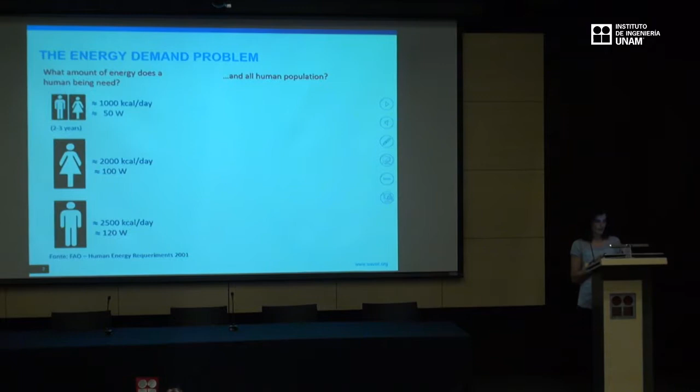And the challenge was to calculate the amount of energy that a human being needs to survive. So he got these values you can see here that are different for women and for men. He attained a value for the energy needs for one person. But the truth is that we don't actually use just the energy that we need to live.

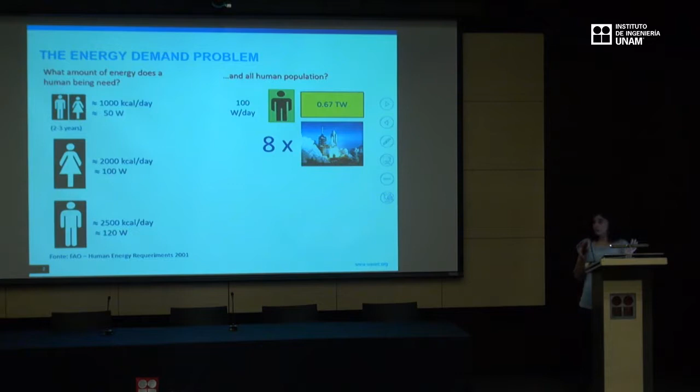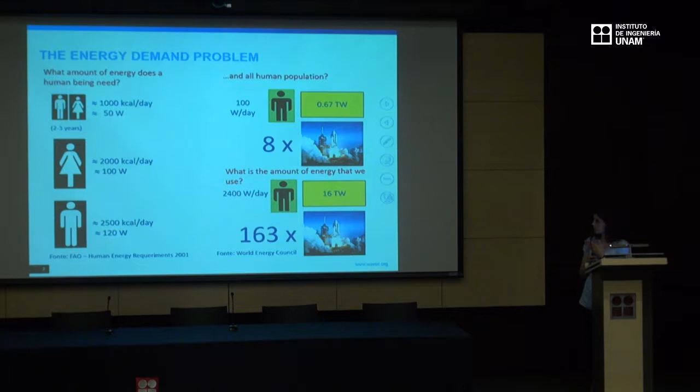If we think about the energy that all humanity needs to live, to survive, we have to have per day 8 times the energy that is needed to put the space shuttle in the air. But actually, the amount that we really are using is much more than that and corresponds to 163 times the energy needed for a space shuttle. The space shuttle goes to space. So this

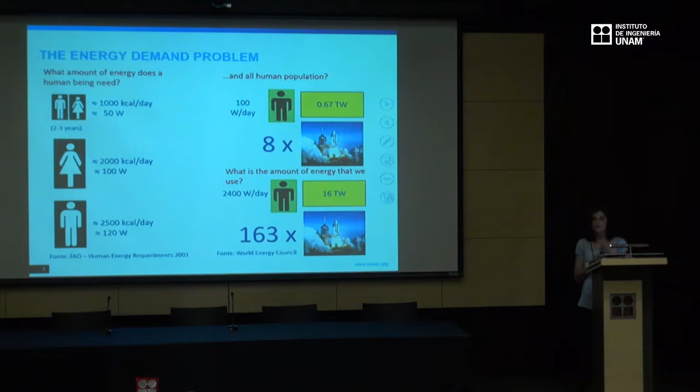is a real problem for all of us because there's a real energy demand that human beings are used to, and we need to face this. The other problem is that the traditional sources from where we get energy are getting rare. We have oil, gas, coal, and uranium, but for all these energy sources, there is a limited time if we continue using energy like I said before.

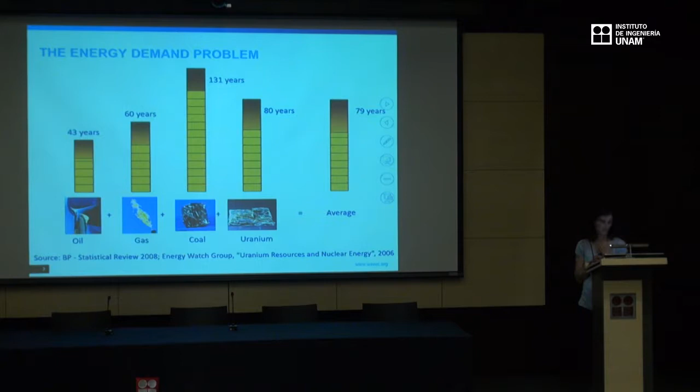So this is maybe a very dramatic prospect. Maybe it's not like this. Maybe this is the worst case situation. But anyway, it shows that this kind of energy is short-time energy available for all our energy demand.

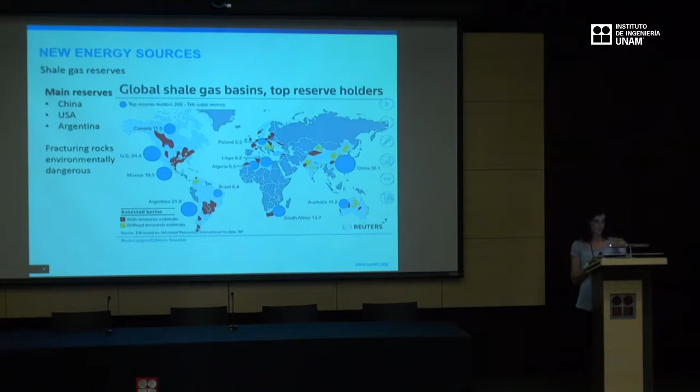So this means that we need to find other sources of energy, and one of them you probably heard about is shale gas. There are a lot of reserves for this kind of energy. It results from the fracturing of special rocks. But the harnessing of this kind of energy is very, very dangerous for the environment, which means that we cannot use it longer. And again, this is not a very good energy to rely on because of that.

The other source of energy that a lot of people are now looking for is the oil present in big reserves below the pre-salt layer, below the surface of the seabed. But again, this has a lot of challenges related with technology. We are not yet there to take the oil that is below this pre-salt layer. It's very expensive to get this oil. And again, this means more oil and more greenhouse gases going to the atmosphere, and we know that is not what we want.

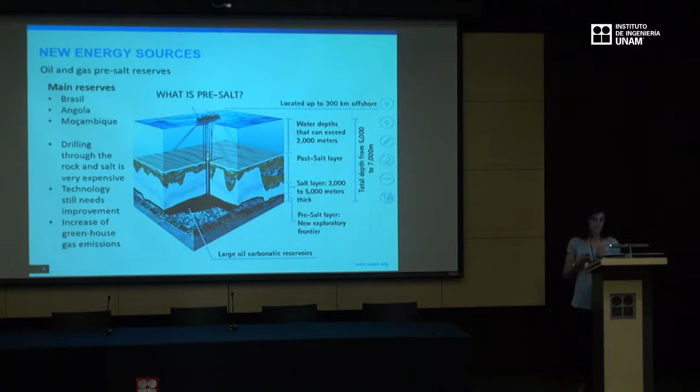So this means that maybe renewable energy can somewhat complete this high energy demand. Of course, renewable energy sources alone could not solve the problem, but this is the sector that has attracted a lot of interest from commercial developers, because it can really be used as a big source of energy for the energy mix that we need to survive and to correspond to this high energy demand.

So what happened is that in Europe we realized that we need to look at this sector with other eyes, and among other targets that were set before, which were very ambitious. Some years ago, the initial EU commitment was to have 80 to 95% of greenhouse gas reduction by 2050, but they realized very soon that this could not be possible because there was no conditions to get there.

So the current trends in the policies in Europe establish that we will possibly get about 40% reduction of these greenhouse gas emissions by 2050, but this has to be done using renewables and also saving energy, or trying to improve that part, because we are actually expending a lot of energy that probably can be saved by other methods.

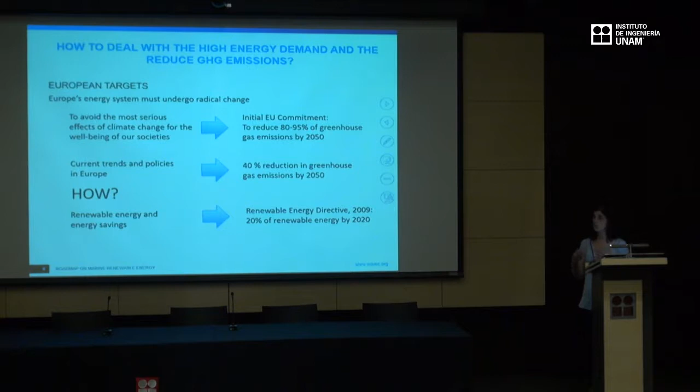These European directives need to be implemented in each member state. So this means that they need to be part of the legislation in each member state, so they need to take it very seriously. And that's what happened. So most part of the countries actually are getting there.

A lot of prospects for 2020 have been made for marine renewable energy, and the graph you see on the left represents the sources of renewable energy compared with the traditional energy that is used by fossil fuels or gas or whatever. You can see that it has increased since 2005, and the trend is that it is going to keep increasing until 2030.

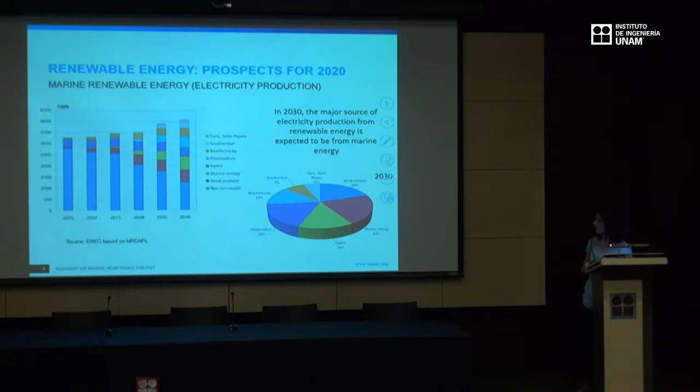Among this very high percentage that is predicted for 2020 in Europe, there is a very important part that is predicted for marine energy. About 20% of the energy that is predicted from renewable energy sources is supposed to come from marine energy. It's the red part that you can see in the pie chart on the right.

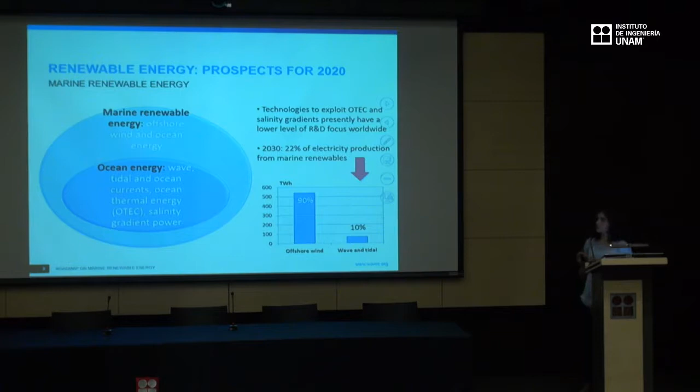So, among these 22% of electricity production from marine renewables, we expect that about 90% of it will correspond to offshore wind, which is the front runner in terms of marine renewable energy, and only 10% to wave and tidal energy. This is mainly related to the progress on the technology that is not yet mature to start commercial production.

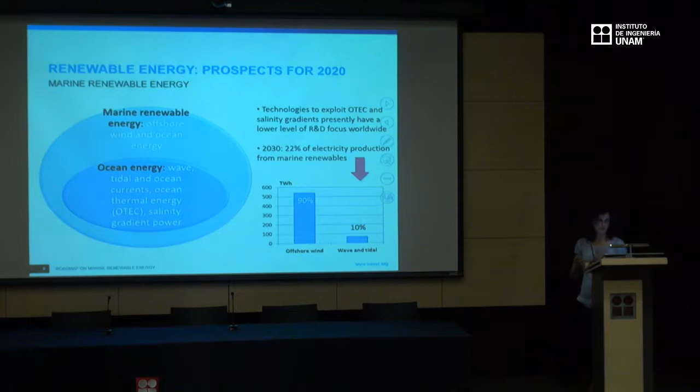Another thing I would like to say here is that when I speak about marine renewable energy, I'm talking about offshore wind and ocean energy. Marine renewable energy includes all the sources of energy from the ocean and also from the wind in the ocean. And when I mention ocean energy, I'm talking about wave, tidal, ocean currents, ocean thermal energy that we call OTEC, and salinity gradient power. The last two are less developed compared with wave and tidal, where technologies have been installed and tested. But for OTEC and salinity gradient power, the things are still a bit more delayed.

This is the prospect for offshore wind. I have a map there that represents the North Sea and all the projects that have been installed and that are predicted for this area in the north of Europe. As you can see, it's a huge area that is going to be occupied by these offshore wind parks.

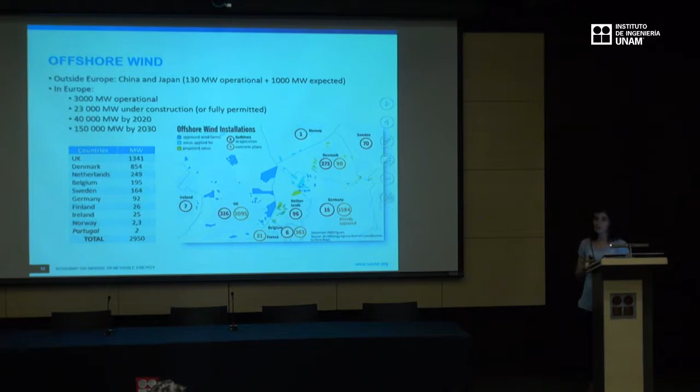But this is not only in Europe. In China and Japan, there are a number of other parks that are predicted to be installed there, and the amount of energy that is going to be produced from them is also very high, and the estimation is that it is going to increase in the future.

So what happens with this offshore wind technology development is that most of the parks that have been installed correspond to turbines that are installed in nearshore areas, where the towers can be fixed to the seabed.

So the big challenge here for offshore wind is to go further offshore. And for that, we need to have platforms. We need to fix or put the turbines floating, otherwise it will be impossible in terms of costs to have the turbines fixed on the seabed with hard structures.

And this is especially because the wind speeds offshore are much better, so it means the turbines offshore can be bigger than those near shore. The resource there is much higher, so it's going to be much more productive to have the turbines further offshore than near shore.

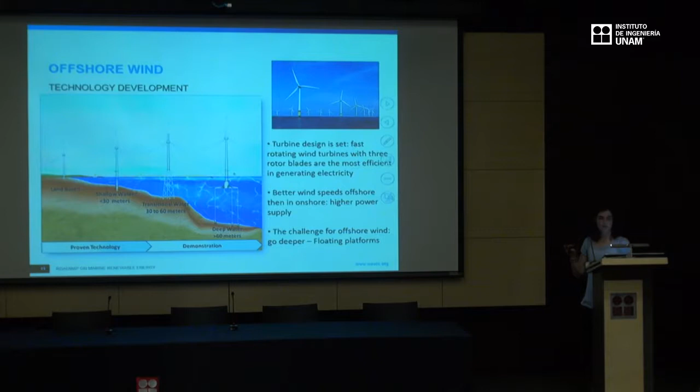So the big technological challenge for offshore wind is to develop these floating platforms that can be feasible in depths greater than 60 meters. This is a big challenge, and this is where developers are in terms of technology development for this sector.

So this is a graph that compares — I'm sorry, it's in Portuguese, but I think you can understand everything that is there.

So on the left you have the costs for several types of turbines. As you can see, the red curve corresponds to the floating structures, which are going to be cheaper if we want to go offshore than the technology used to fix turbines to the seabed.

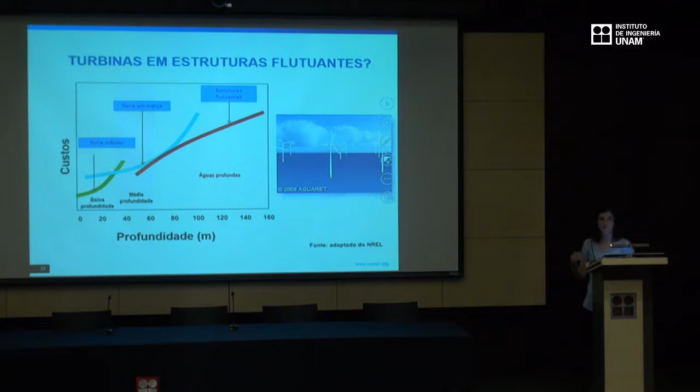So this is one example of the projects that have been installed in Portugal. This is a floating platform that was installed, but I will come back to this project in some slides. This is just to show you how these platforms may look, and I will speak about that later.

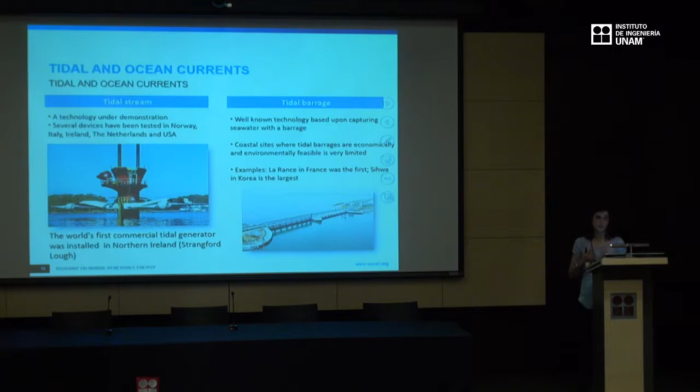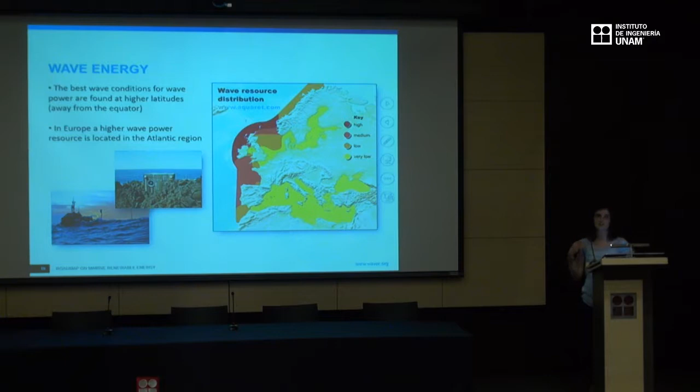So I put also there two examples. One of them is the Pico plant. It is actually owned by WavEC, the company for which I work. We are responsible for this plant. It was actually one of the first wave energy devices. It is still working, but as you can see, it is falling apart. It needs money to be refurbished, and we don't have it. But it is still a device that is working, and it is producing energy to the local grid.

So there is a very high diversity in terms of wave energy devices that have been tested and continue to be tested in waters all over the world. They have a lot of different designs, as you can see. But this is also because the type of waves you have in a given place are different, which is why there is so much diversity in the technology types for wave energy harnessing.

So I would like to go now into the types of technologies, or the groups of technologies that represent different concepts. They can be summarized into 6 different groups, each made of a common concept.

So in terms of location, we can have devices installed onshore. The Pico plant, the one I showed you before, is one example. Nearshore means 15 to 20 meters depth, or offshore, when devices can be installed at more than 50 meters depth.

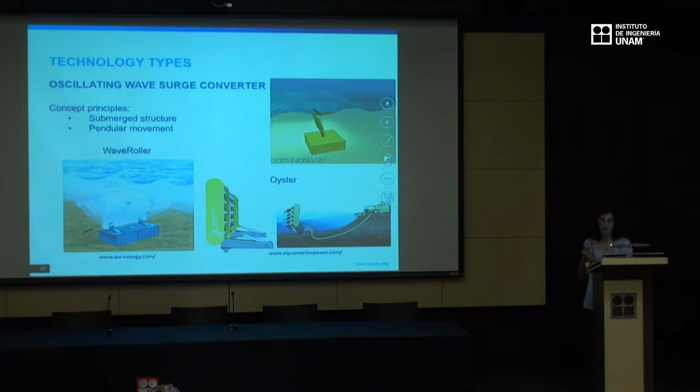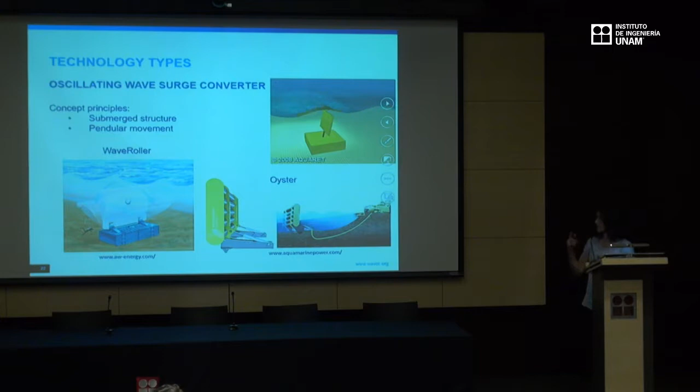Examples of these technologies are the WaveRoller, one of the projects installed and tested in Portugal, and the Oyster project, which is actually the same concept with the wing, but with a different design.

Then we have this oscillating water column, which actually my colleagues from the technology believe a lot in this kind of concept, because all the moving parts of the device are not in the water; they are out of the water. In this concept, there is an empty chamber, and what the wave does is just to move the air inside of that chamber, and the air makes the turbine move. The small turbine you see on the top is moving with the air that moves inside that chamber.

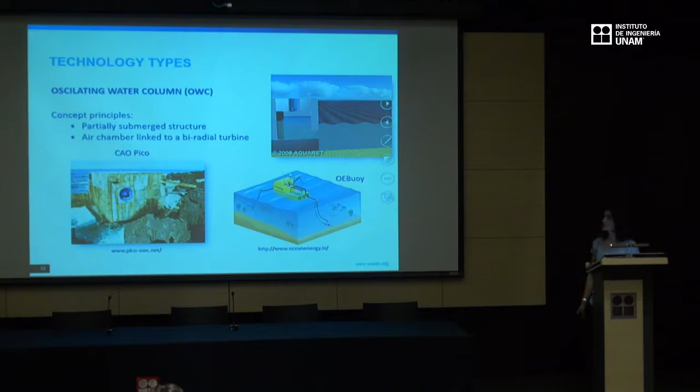So the Pico plant in Azores, the one that is owned by WAVEC, is one example of this concept. But there's also oscillating water columns that are installed offshore, like this OEBuoy.

I think this is the last one, overtopping. Here, the device is made of a very big platform, and the wave crosses that platform, overtops this platform, and then goes through that hole that is there, and this movement of the water makes the turbine that is inside that hole move according to the water through it.

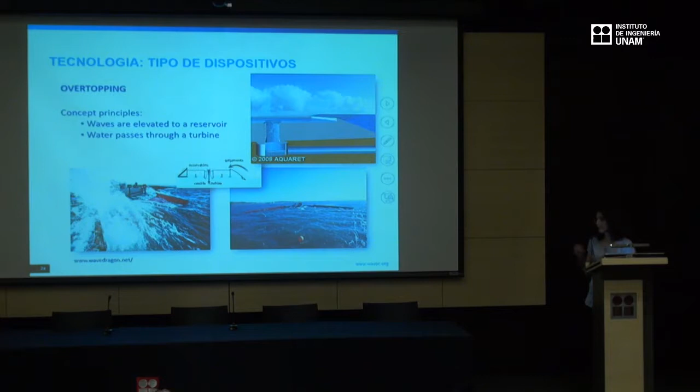So the only device that was installed with this concept was the Wave Dragon technology, but then again, it was installed just once, and it was not full scale. So it was a device that was installed, and the tests were somewhat successful, but it doesn't resist a very strong storm, and at the end the device ended up on the beach. It was not very good for it.

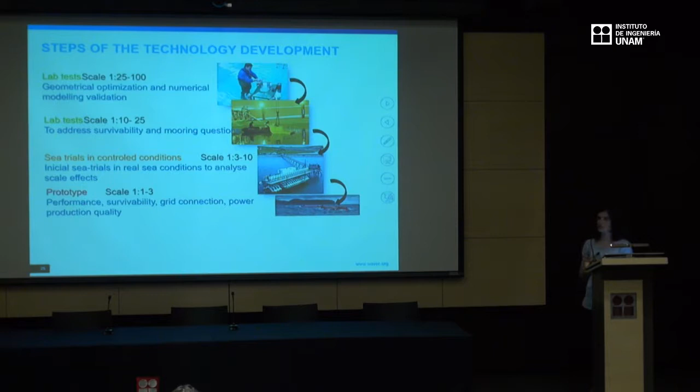So after explaining the main concepts of wave energy, there are a lot of other challenges that a developer needs to pass through in order to have a feasible device to rely on. So these are actually the main steps. This is not only for wave energy, actually. It also involves tidal and offshore wind. So anytime a technology needs to be tested, needs to be developed, these are the main stages it needs to pass through.

So the first one is a very small model that is built to be tested in the lab. And here the geometrical optimization and numerical modeling is the main activity. So the device needs to pass these two tests. Then in a bigger scale, new lab tests need to be carried out to address the survivability and mooring strength of the device. So this is the second phase of the development of the technology.

Then you have the sea trials, first in a controlled situation. So usually when you get to this phase, you pass the first two, and here you need to find a place that is not very exposed to the ocean, but has some conditions to try a device that is not full scale. It's again a small scale device. And here, during these sea trials, the scale effects are tested in order to prepare the device for the full scale.

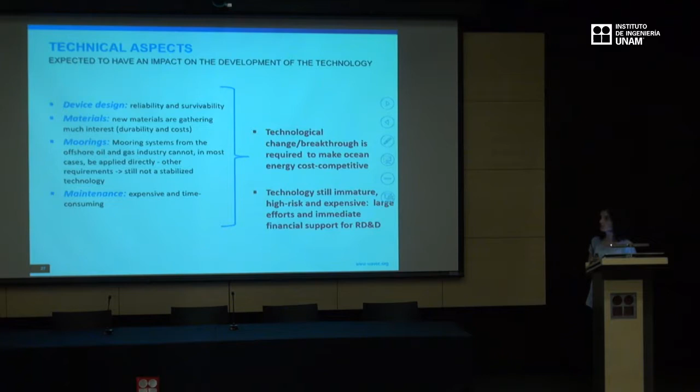So, as I was saying, there are significant risks impeding the development of these new technologies: reliability and survivability, cost reduction potential, capital investment, revenue support, but also there's a very important part of all of this that is related with the regulatory risk. The projects need to be licensed. Sometimes when you decide to go for a given technology, for a given site, a lot of uncertainty is still in the regulatory process and in the licensing process.

You don't know if the location you have selected, or even the type of device for that specific location, will be the most appropriate, and this needs to pass the authorities' proof. And this is not always easy, because some of the countries, even in Europe, don't have special or dedicated licensing procedures, which means that the time for licensing a project like this is very long, and these very long periods don't really match with the financial investment behind them, because investors want results. Usually people that invest would like to have income in a short period of time, and the regulatory framework doesn't help in some cases.

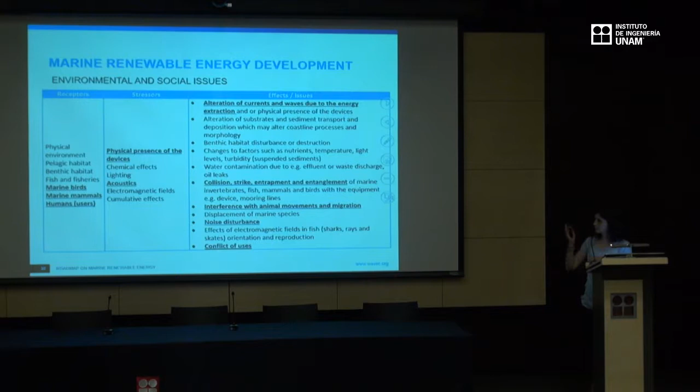The social part is related with the communities, the local communities, that are not always fans of these projects, especially the fishermen, because they are going to lose fishing areas. They will need to fish in other places, and they are usually not very keen to have the projects in their backyard or in the place that they use to do their activities. So I will not go through all of them, but if anyone wants this presentation, of course, I can send it for you to see what could be the most important impacts related with these technologies.

So, as a conclusion for this part, then I will present the WindFloat project. But as a conclusion, there are factors that can act as a barrier, but others that can act as accelerators for the installation of this kind of technology. The first one is the resource assessment and the geographical characterization of a given area. For some countries, we know that the resource is there, but we don't really know what are the best locations to put that specific device or that specific type of marine renewable energy. Some places are better for offshore wind, others for currents, others for wave. So it is very important to have a characterization of the country's coasts, to be sure that we are installing the technologies in the most proper places.

Then we need to have technology and research and development accompaniment of all the projects, of all the technology development, and the technology is in progress. So there's not yet any technology, at least for wave, that we can say is the right one for this type of wave. So we cannot say that yet. So we are a bit far from having these wave technologies in a mature stage to say that we can rely commercially on them. Of course, for offshore wind, this is completely different because there's a turbine that is very well tested, at least. So the problem is more related with the mooring of the turbine if we want to go further offshore.

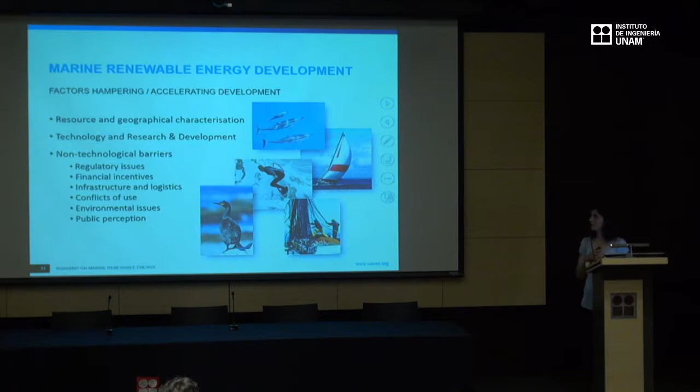And the public perception, which is also sometimes not very good. Actually, people are very pro having renewable energy because it is a clean energy, but at the end, if the devices are going to be installed in the place where the person is used to go for a run, or near a beach that he or she uses during the summertime, that is a very big problem. Sometimes public perception in these local areas is not the best. So this is also considered a barrier for the progress of the sector.

So, having said that, I have some more slides on this big project that was installed in Portugal, called WindFloat. WAVEC was responsible for the activities I put there: benchmarking, environmental monitoring, public outreach, fieldwork with ROV, and data analysis. So we did this for this 18 million euro project, and well, it was a successful project, but there were a number of issues that I will list here for you to know a bit more about it. So this is a 2 megawatt turbine located in Aguçadoura, a small village in the north of Portugal, near Póvoa de Varzim. It's the main city in the area.

And the project was led by a consortium made of a number of companies. Principal Power is a US company that was the technology owner, so they own the concept. And a number of other companies: EDP, which is the power utility in Portugal, Repsol, which is an oil and fuel company, A. Silva Matos, a civil engineering company that was responsible for assembling parts of the device, Vestas Wind Systems, which provided the turbine for the tower, and InovCapital, which was a funding agency that was also involved in the consortium.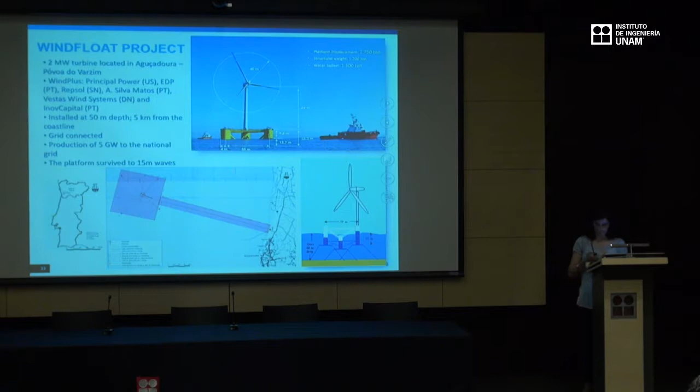So, one of the main problems related with the installation of this device was the environmental impact assessment. Well, the developer had to carry out this EIA, and the main objectives were to demonstrate and confirm the findings or the evaluation of the impacts, to determine appropriate steps to mitigate negative, if any, environmental impacts. So, actually, these are not EIA objectives, these are environmental monitoring objectives. So the monitoring that was carried out during the project operation was to confirm or not, or to evaluate, the impacts that were identified in the EIA phase.

Which means that the developer needs to carry out monitoring activities related with underwater noise. A lot of measurements need to be carried out during a 1 year period after the device was installed. Marine mammals: there was a very big concern about the species that distribute around the area, and this was related with entanglement or entrapment or collision with the platform, but also with the mooring lines.

There was a concern that the marine mammals could somehow be entrapped or entangled with the mooring lines, which is a bit stupid, I think, because these mooring lines are very, very thick things, so they move very slowly, as you can see in the water. So I don't think this was, and it was not a problem actually at the end, for entanglement or entrapment of marine mammals in the area. But anyway, there was a potential for collisions. Yes, this was a very important aspect to be concerned with.

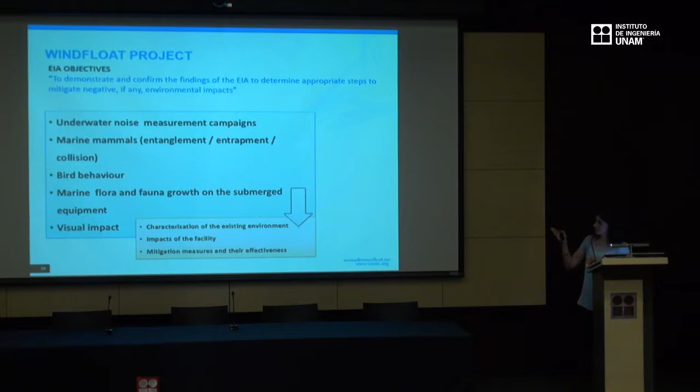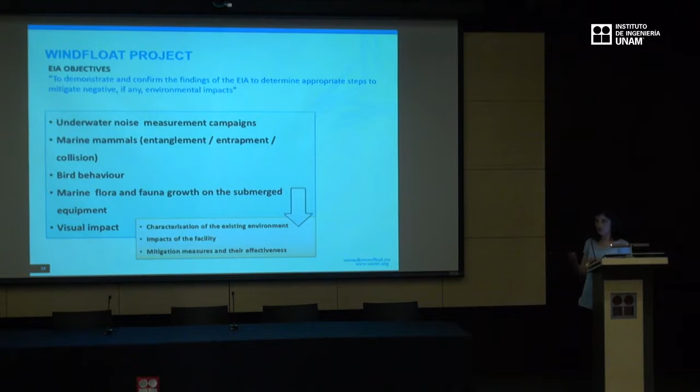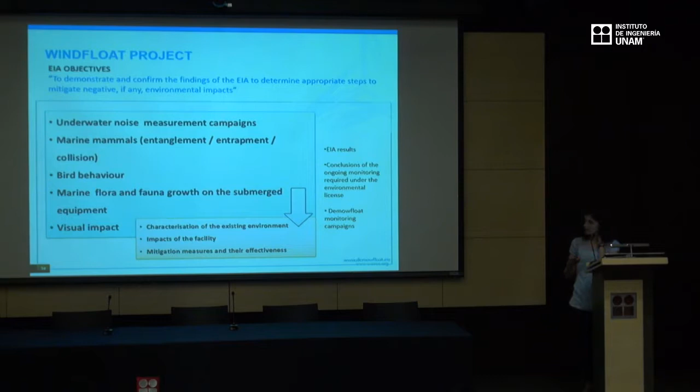So during these monitoring activities, these topics or descriptors were made based on the characterization of the existing environment, the predicted impacts of the facility, but also the monitoring activities were carried out to confirm and also to see if the mitigation measures that were listed were actually effective in the area. So what I'm going to show you is some results of these monitoring campaigns.

also the background noise in the area, because this is very important when the acoustic conditions of a given area are strongly related with the sea state, which means that when you have storms or rain or very high waves or a very hydrodynamic place, you can expect that the natural noise will increase compared with calmer sea states. So this has to be taken into account, of course, when you are studying the acoustic conditions

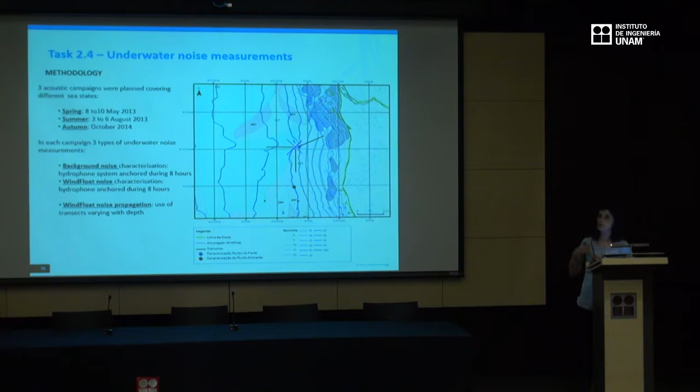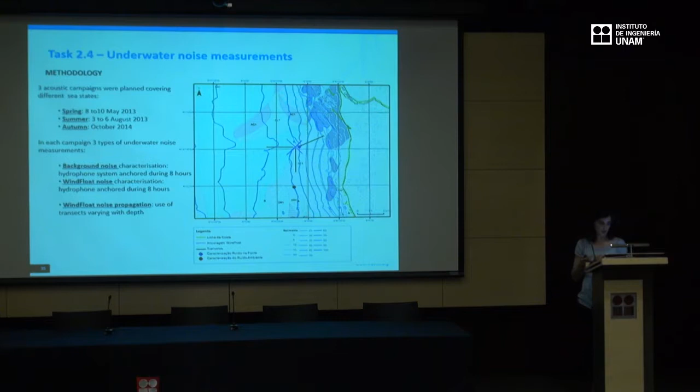of a given area, but also the measurements were to characterize the source of noise, the type of noise that was produced in terms of frequencies and intensities, and what was the propagation of the sound along the transect. So the transects were used to understand the propagation of the device noise around the area. We made 3 acoustic campaigns during spring, summer and autumn to characterize the 3 types of parameters I already mentioned. So for the background noise, of course, we detected that the sea states during storms are very important to reduce the propagation of the turbine noise.

The noise can be heard mainly on the surface, but it is also detected at 25 meters depth when the turbine is rotating at high velocity. We understood from our results that the noise can be heard up to 1.5 kilometers from the device when the sea conditions were very calm.

So this is actually not a very big distance, but another important finding is that we detected the presence of marine mammal vocalizations around the device, which means they were probably very curious about the structure and went there just to see what it was. They use echolocation, emitting and receiving sounds to understand what obstacles are in the area. So they probably went there to see, oh, what is this? They were very curious about it.

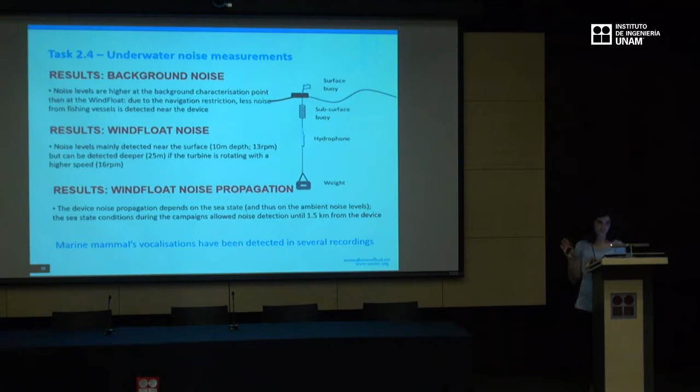The analysis of entanglement, entrapment, and collision focused on two main species: the common dolphin and the harbor porpoise. The second species is considered very vulnerable; its conservation status is not very good. This was a big concern because these species are also very difficult to detect, as they are very shy. They don't show up when they hear some kind of vessel in the vicinity; they go away, so they're very hard to observe.

Observation of this species is usually made with acoustic methods, which were not used during the monitoring activities. We only used visual observations in the area, so it was not possible to detect these species there.

So the distribution of the common dolphin and harbor porpoise relied on literature and expert knowledge existing in the area to establish the baseline situation. We then used visual campaigns with a boat and observers, doing transects around the device, to understand the distribution along the area and compare it with existing information to see if there was any change.

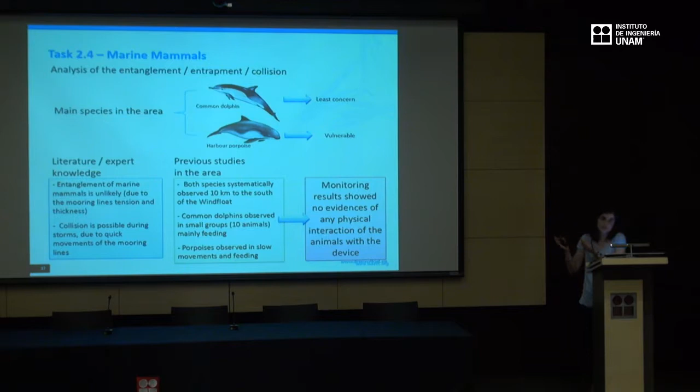In the end, no results show evidence that the turbine can have any effect on the distribution of these species. And from the acoustic surveys, which weren't directed at measuring these species but at the noise of the device, we understood that they are indeed distributing there and are curious about the device.

Another important problem related to the installation of this device is the colonization of the platform by biofouling. This is important because these artificial structures usually provide new habitats for species to grow and develop. Sometimes the species that attach to these structures are exotic, not belonging to the local ecosystem, and they can dominate it—these artificial structures may allow them to spread and harm the natural environment in the area.

That's why the authorities wanted us to figure out what kind of species were colonizing the structure, and whether there was evidence of exotic species growing that could damage the environment in the area.

So we made some ROV campaigns to understand the growth of these species along the pillars of the device, as well as on the lateral structures. We found that the first 2 meters of the pillars were colonized with algae—this isn't rocket science, since they usually colonize places with more light for photosynthesis. The first 2 meters were made up of red algae, but also mussels.

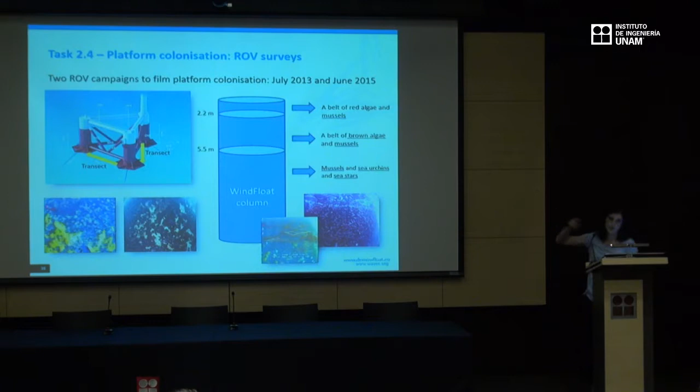The next layer was brown algae and mussels again—brown algae likely need less light than red algae, which is why they colonized the second layer. The final part of the pillar was colonized by mussels, sea urchins, and sea stars. I put some pictures there, taken from the pillars, though they're not very good on the screen.

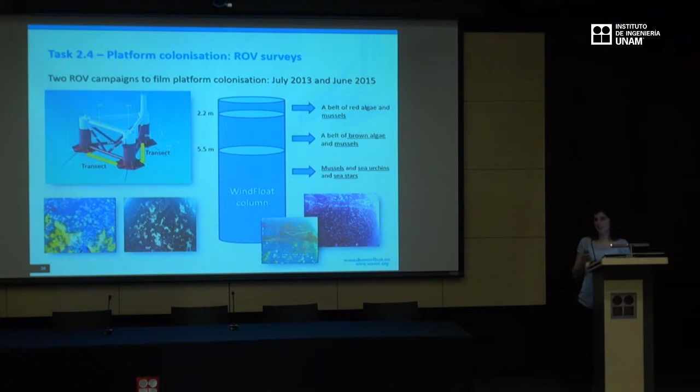We didn't actually identify any exotic species on the platform. So these are more results about the platform colonization.

Yeah, this is too specific for ecologists. I don't know if there are any biologists in the audience, but yes, there are some. So you probably understand very well these graphs here, which try to compare biomass values among pillars and also among depths.

We made an analysis of the results to understand if there were any differences in the colonization of the platform as a whole. We found that the pillar more protected from the currents oriented north to south was the most diverse in terms of species composition compared to the other two, which were more exposed to waves and currents coming from the north. This was the main condition, but it's not a very innovative conclusion, because it's actually what happens in the end. We just confirmed it was working as it should.

So for the seabirds, we were also involved in this kind of survey. For the seabird surveys, a radar needed to be installed on the substation. There was no possibility to install the radar on the platform, because the structure was not dimensioned to include the power needed by the radar for the survey.

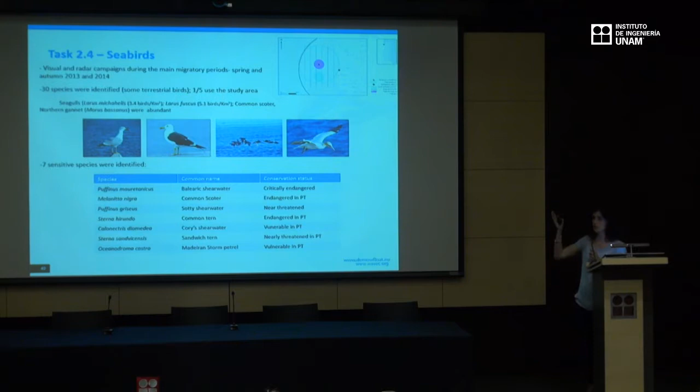We also saw that some of them had a conservation status that was not very good, especially the Balearic shearwaters, because they are critically endangered. So it was possible to prove they are distributed in that area. If a park is built in that region, this could be a big concern in terms of this species' conservation that needs to be taken into account.

And finally, this is my last slide, I think. Yes. So the other part we did was to try to understand the effects of the visual impacts for the population that uses the area. We carried out a number of questionnaires to understand the opinion of the people regarding this infrastructure.

We selected 4 viewpoints and went to these several viewpoints to distribute the questionnaires and get public opinion on the device. The opinions showed the Portuguese people are not very much against the project. Actually, the project was a very tiny spot on the horizon, so it was sometimes very difficult to see, because the sea conditions may not be very good.

There was a lot of fog during several, very long periods of the year, so actually the people could not really see the device working there. But, well, one device doesn't make any difference, so most people were okay with having it on the horizon, no problem for that.

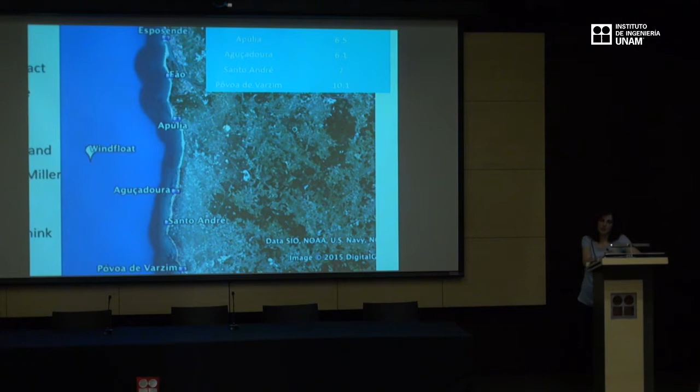There were some people around in the public session from the port authority and also from the municipality, and those two persons were very considered in the region, very respected.

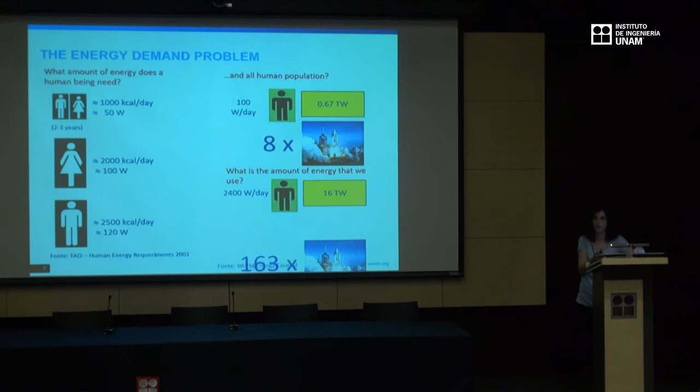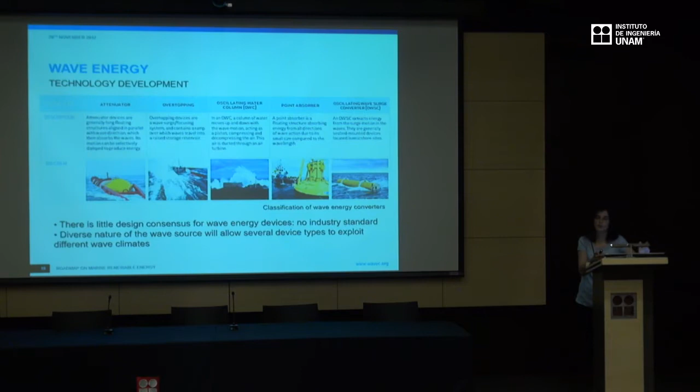That's what saved the day, because they helped us a lot trying to calm down the fishermen. At the end, he was convinced that it was not safe for the fishermen to fish in the area. After the developer said he would compensate him with some money, he calmed down, and then the discussions started to be productive.

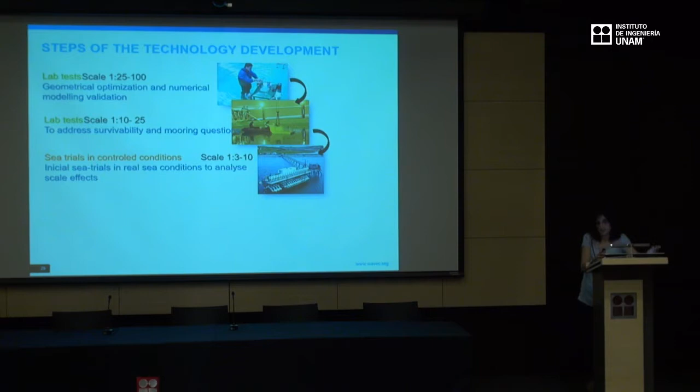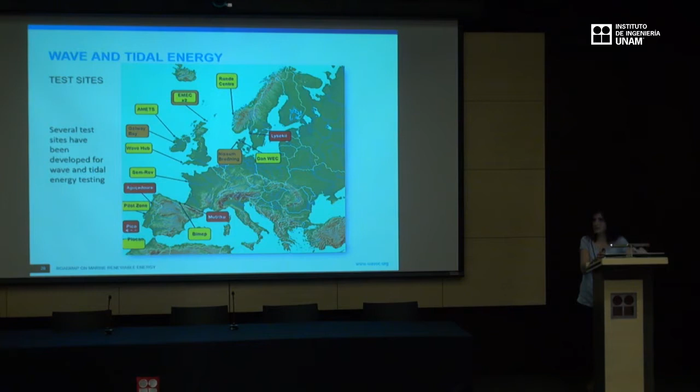At the end, they needed to move from that area. They could not fish there, but it was only temporary, because the project was installed from 2011 until 2016, so it was decommissioned last year in August. Some years it kept the fishermen from using the area, so it was okay for them.

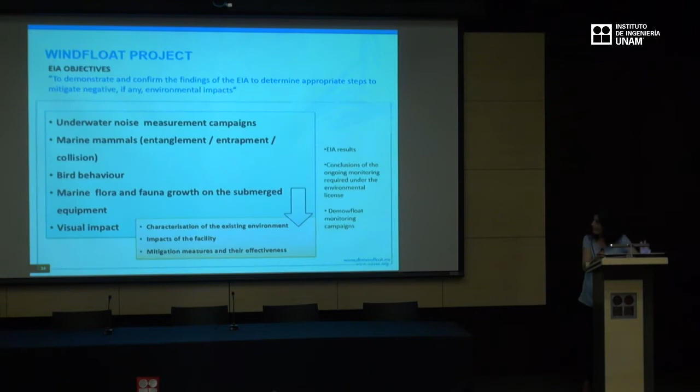I think that's what I wanted to show you. I don't have any more slides, but if you have questions, podemos hablar en español, si quieren.

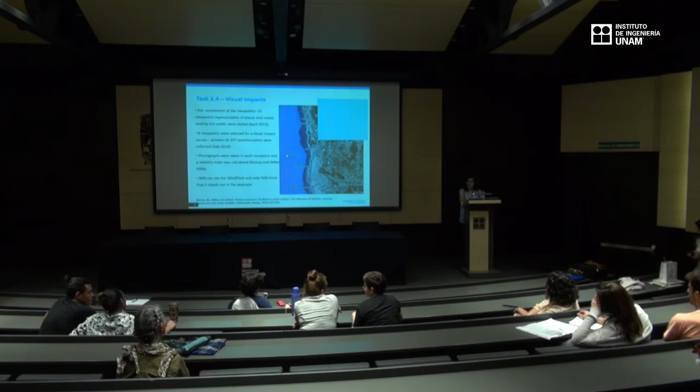migration routes. So what they did to mitigate the deaths of birds that could pass along was to install this radar system that scans the area around. I don't know what the distance is, but it scans the area in order to detect the passage of these flocks during the migration periods. And what the system does is stop all the turbines when the flocks are approaching.

So these are the kind of systems that are expected to be working to mitigate this kind of structure. So it is another level of monitoring and mitigation that is needed for parks and for multi-turbine places or very large spaces occupied by this. Yeah.

Do you have a specific procedure to evaluate the environmental impacts for each different type of technology and different type of design, or is there one guide for these procedures? Yeah, usually the environmental impact assessment process is the same for any project. Of course, when you are talking about marine projects in the marine space, there are some descriptors that need to be addressed during the environmental impact assessment that are different from the projects

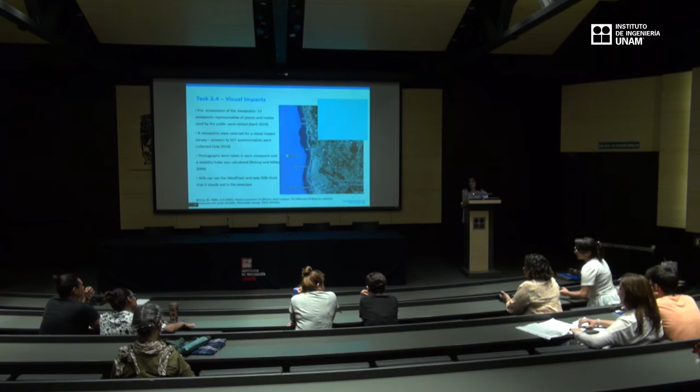on land. But usually the environmental impact assessment is a process that has a lot of steps, and the first or the second step is the scoping phase, where you evaluate what would be the scope in terms of descriptors, in terms of spatial use, in terms of area that needs to be surveyed. It's the phase where you set all this. So depending on the project, during this phase is the time to list what will be the concerns, the descriptors that need to be taken into account to carry out the environmental impact assessment.

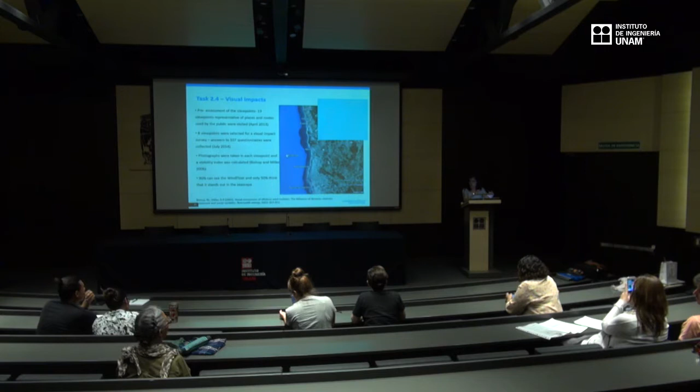So there is a general procedure. Usually the environmental impact assessment process is more or less the same everywhere. Countries sometimes give more importance to specific stages of the process, but in general all licensing, all environmental impact assessment processes around the world obey the same standard structure. So this is what we have, but of course the first step is to adapt the environmental impact assessment to the specificities of the project that is being analyzed.